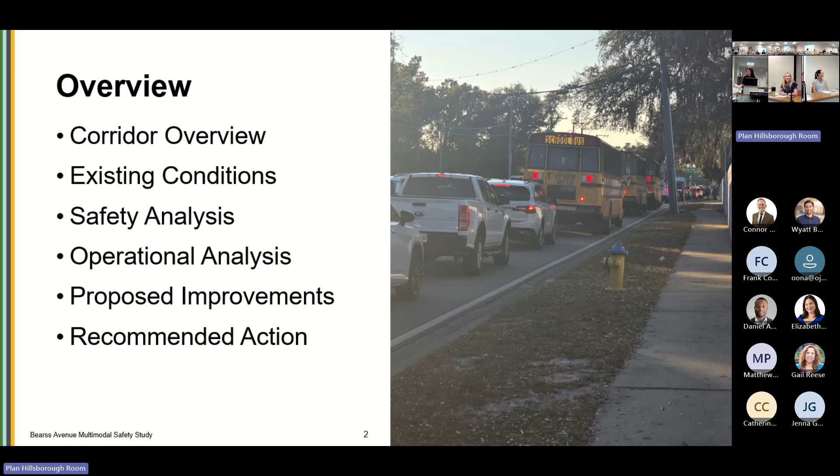I was counting - so that's nine. To give you a better orientation, I'm glad Hillsborough County Schools is here today because Buchanan Middle School is on the very western half of the segment, on North Boulevard. As I said, Hillsborough County owns Bearss until Florida Avenue, where it changes ownership or maintenance to DOT.

So why is this project important? The community profile shows that housing units with no vehicles, low-income households, and renter-occupied households are all above the countywide average. That's one reason why multimodal access is really important along this corridor. The other reason is that we have a middle school on the western side.

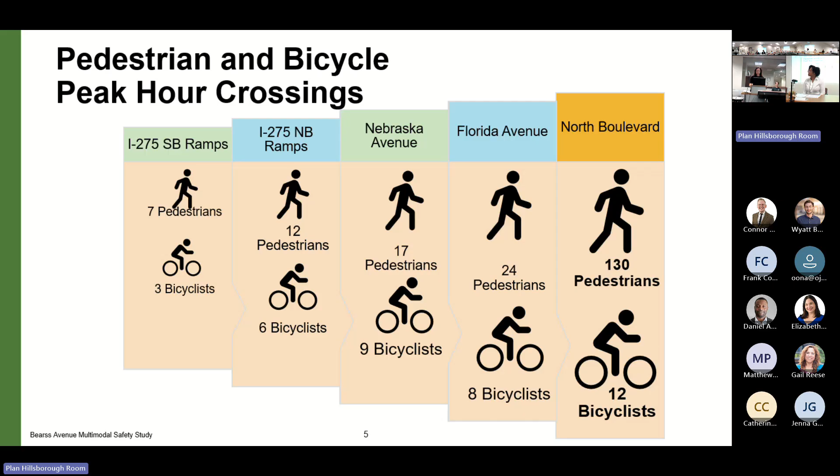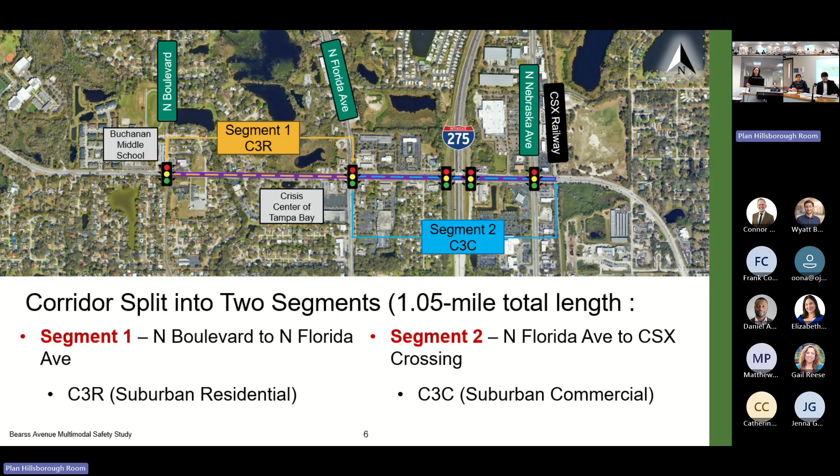To identify the differences in the two halves of the segment: the Hillsborough County owned segment from North Boulevard to Florida has more of a residential feel, with neighborhoods on the north and south sides of the road. It's an urban section with curb and gutter, a 4-lane divided highway with either cross medians or turn lanes. When we get to Florida Avenue, it becomes mainly commercial land uses on the north and south side, and the lane count slightly increases as we head towards Nebraska Avenue, but it stays a divided arterial.

This shows two graphics. The graphic on top is the residential section with curb and gutter, and the graphic on the bottom is the commercial segment 2, which is right now mostly flush shoulder with some drainage swales on the sides.

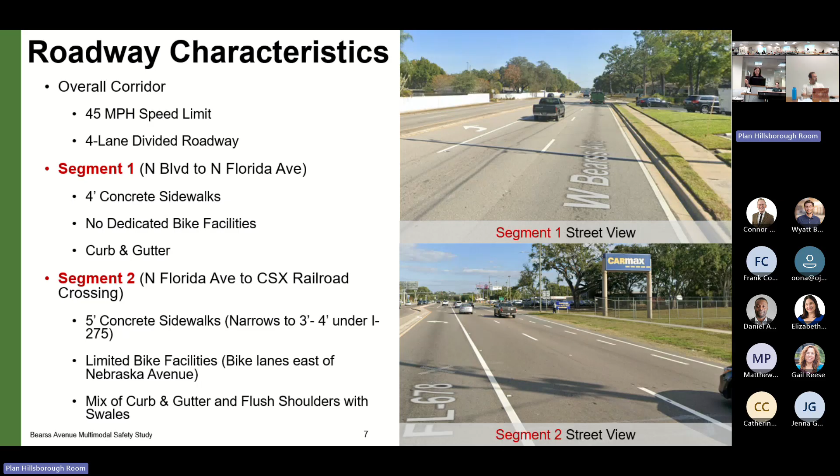There are segments of curb and gutter. Of important mention, the speed limit is 45. The existing sidewalks range from 3 feet to 5 feet, so they're quite narrow, and there really are no dedicated bike facilities. The only bike facility is a very short segment that starts east of Nebraska, at the very far eastern end of the study corridor.

We did a field review, and we also found that there are a number of ADA issues, meaning a lack of ADA compliance with the ramps and push buttons along the corridor.

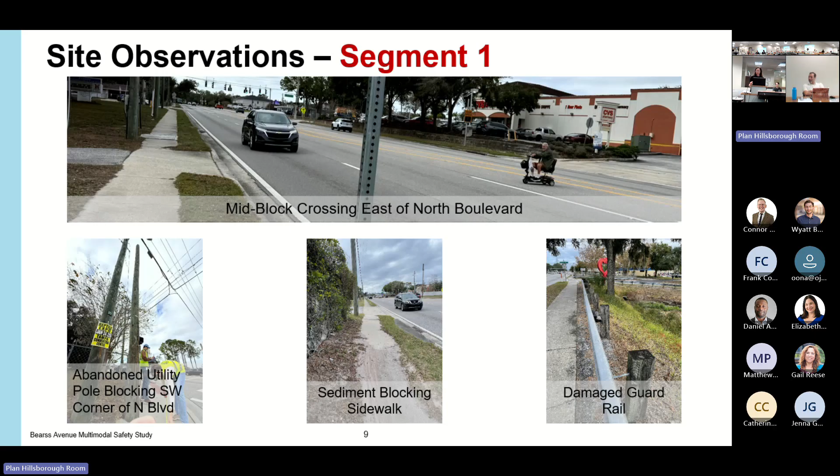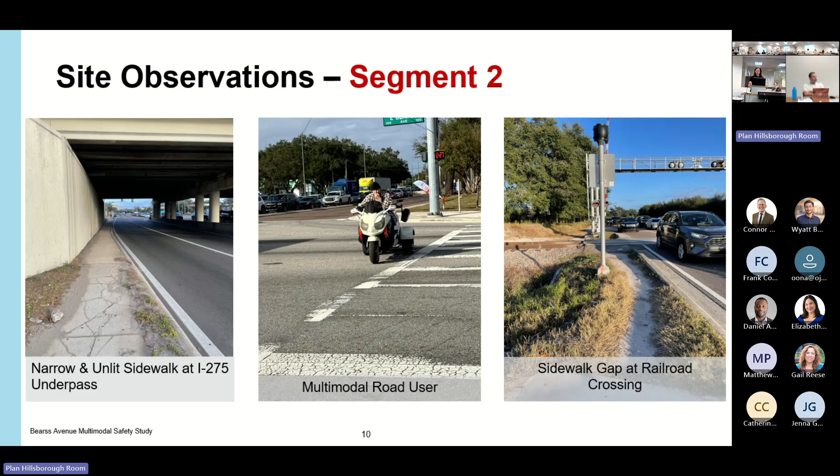Some other things we noticed during the field review: there's a lot of different micro mobility throughout the corridor. This picture at the top is just one of many we noticed of micro mobility. This gentleman was actually crossing mid-block, which is one of the least safe ways to cross - an uncontrolled crossing. That's another micro mobility example. The sidewalk under the I-275 overpass is actually the narrowest part and has the highest stress level for pedestrians and bikes. There's also a lack of sidewalk within the railroad right of way, shown in the picture on the far right. You can tell it's highly traveled because there's a dirt path through it, but there's no sidewalk on the north or south side of Bearss.

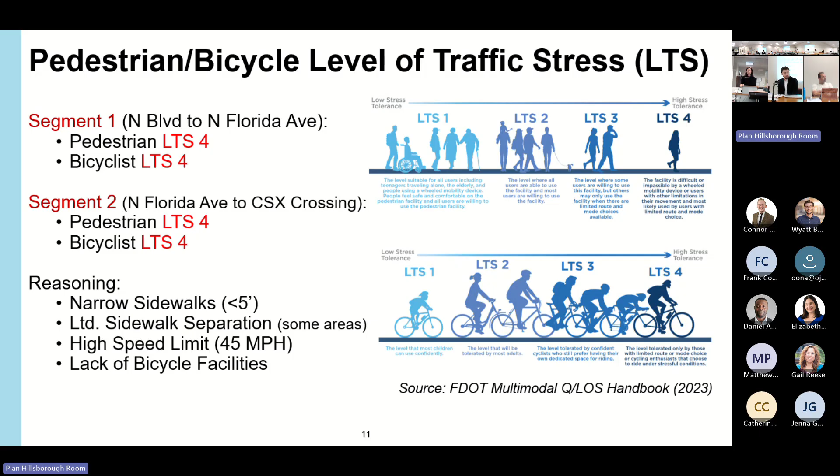I mentioned level of stress - the level of stress analysis showed that for both pedestrians and bicycles, it's the highest level of stress, a level of stress 4, which means we need to make some improvements to the multimodal facilities along Bearss.

We did an in-depth crash analysis. For the pedestrian crashes, they were all concentrated between North Boulevard and I-275. We had 4 high severity pedestrian crashes, which is a very high number considering the short distance of the segment. It resulted in 1 fatality, two people incapacitated, and 2 others with non-incapacitating but higher severity injuries.

There were 4 crash events but 1 involved 2 people, so 5 people total. Three crashes occurred during mid-block crossings between North Florida and I-275 - they were crossing at an unsignalized location and darting across the road. That resulted in a fatality and 2 incapacitating injuries.

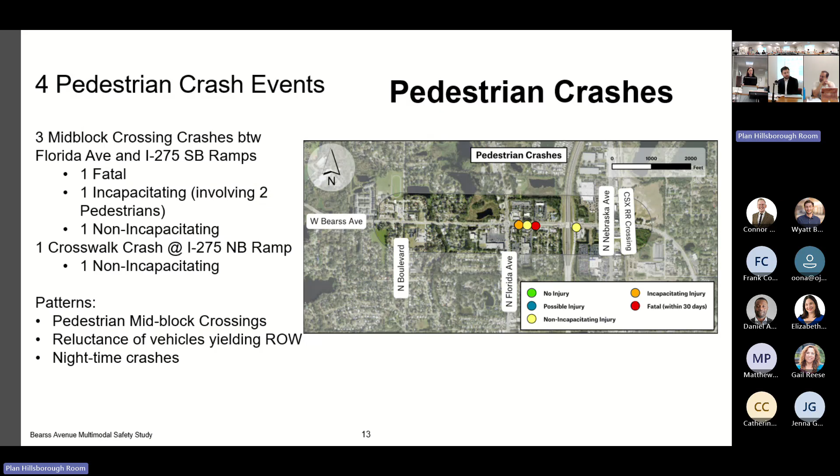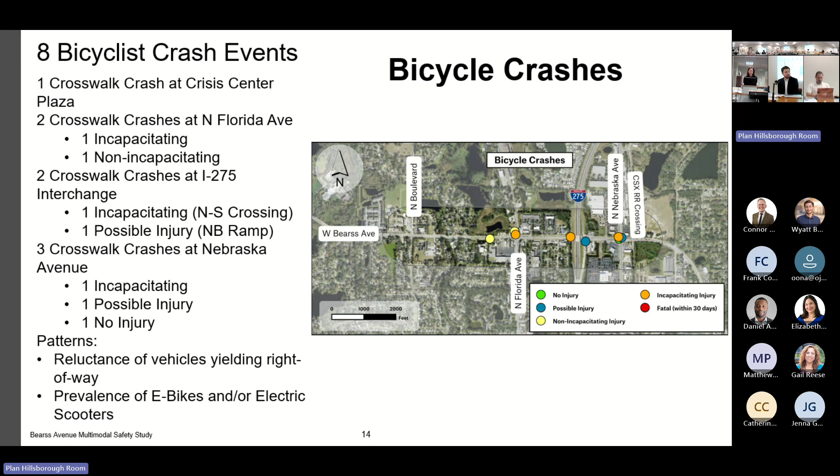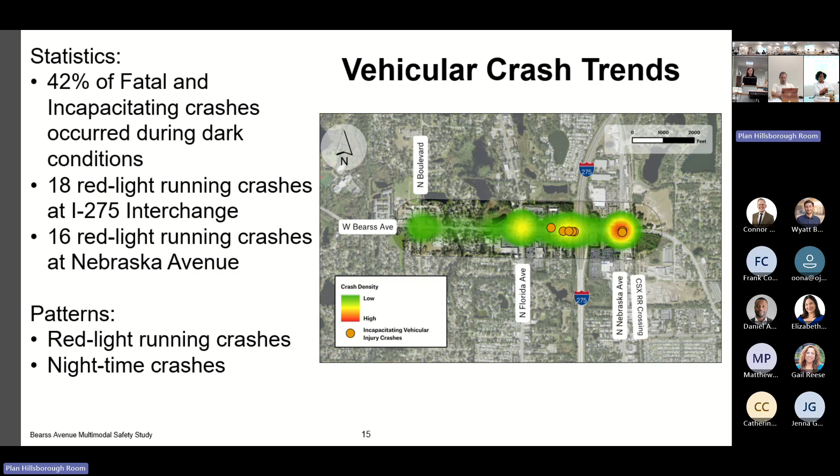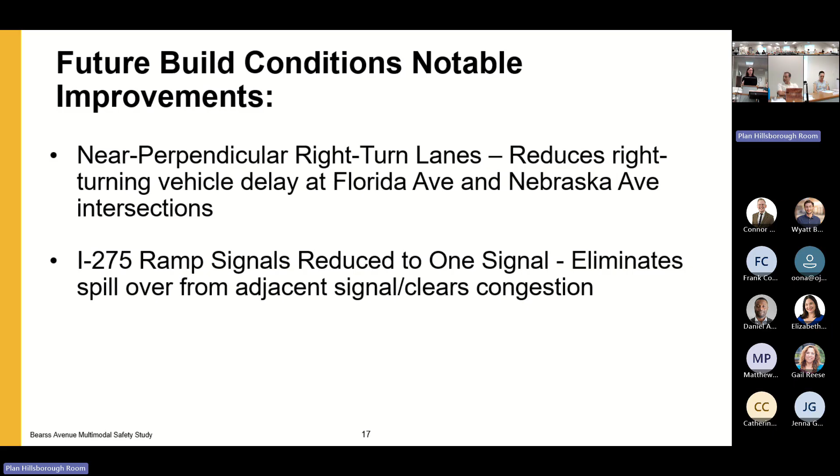One of our recommendations for Florida and Nebraska is to install what's called near perpendicular right turn lanes. That's also going to help with vehicle delay, but also increase the awareness of the driver to reduce the crosswalk crashes - the crashes occurring in the crosswalk.

Diving into our proposed improvements along the corridor, I'm going to go through corridor improvements, and then I'm going to get into intersection specific improvements.

Our recommended corridor improvement for a ped bike facility is to do a shared use path. This is going to be the safest solution for the speed of the road, and also the most feasible solution instead of trying to repurpose a lane and turn it into a dedicated bike facility. We're recommending a shared use path that provides a curb separating the vehicles from the path.

It provides a wide enough facility that it can be used comfortably by pedestrians and bikes. Our second corridor wide improvement is the lighting, which relates to the high percentage of nighttime crashes. For speed reduction, we're recommending narrowing the lane widths to 11 feet. We're also recommending street trees in the medians along the Hillsborough County segment.

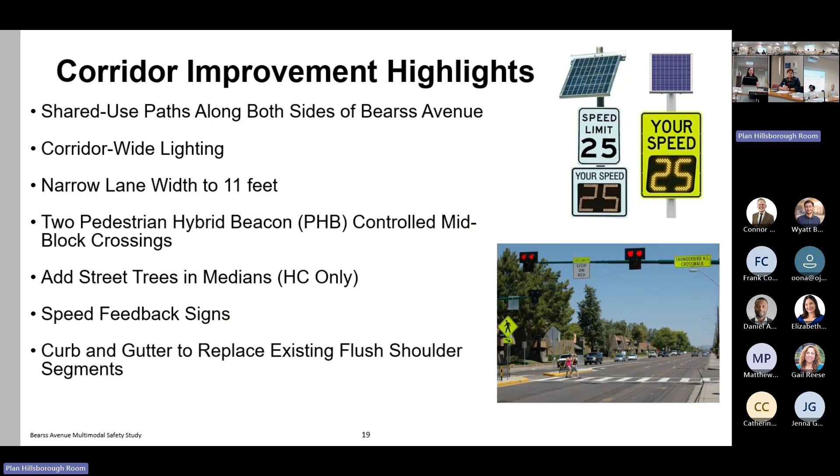There are some grass medians where we can install street trees. We're also recommending speed feedback signs, and to offset the mid-block crossing crashes for pedestrians, we're recommending two pedestrian hybrid beacon controlled mid-block crossings. One of those is going in the exact location where we have the existing crash history for pedestrians. The other we're recommending in front of the crisis center, between North Boulevard and Florida. You notice people crossing mid-block there. Fortunately we don't have the crash history, but we want to get ahead of that and provide a safe crossing, because it's a decently far distance to the nearest signalized intersection.

Jumping into intersection specific improvements, internally illuminated street signs and updating the backplates for all the signal heads are two pretty easy improvements to make. The more costly and design intensive improvements that we feel are necessary are upgrading any strain pole signals to mast arms and upgrading all the signal technology to the latest ITS technology.

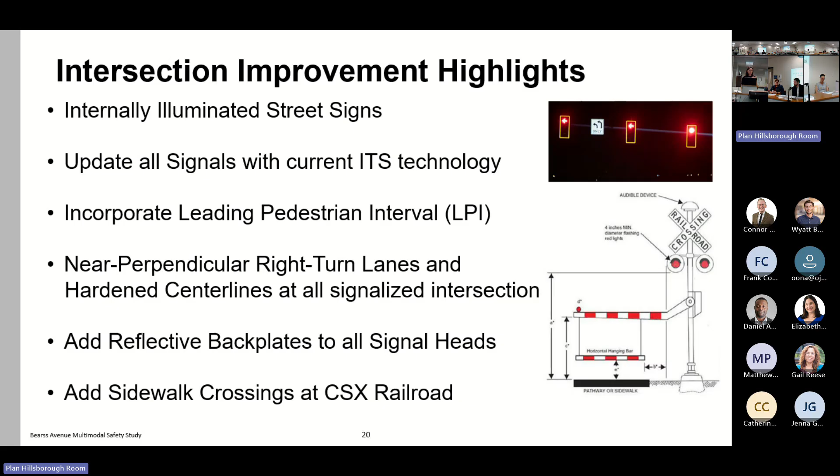I already mentioned the near perpendicular right turn lanes, and with adding sidewalks across the railroad crossing, we're going to need to change the railroad signals so the arms stop anybody using the sidewalks.

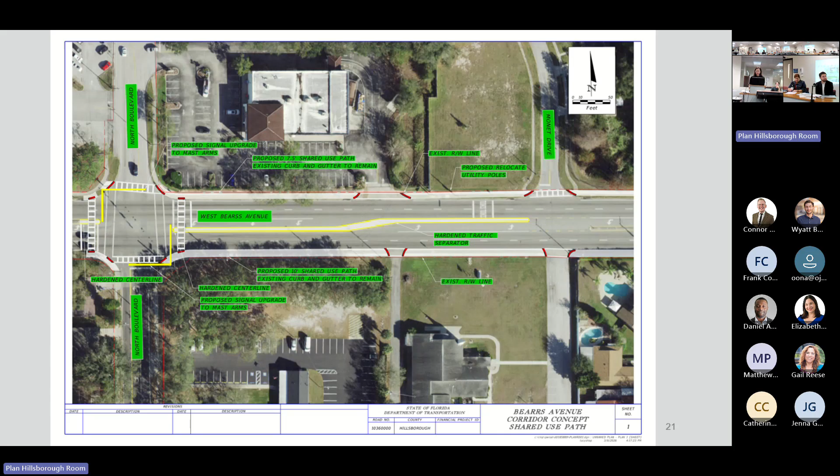These are some corridor maps we put together to graphically show the improvements. This starts at North Boulevard, at Buchanan Middle School. This shows the shared use path on the north and south side, and the signal upgrades at North Boulevard. As we go east, it's the same proposed typical section.

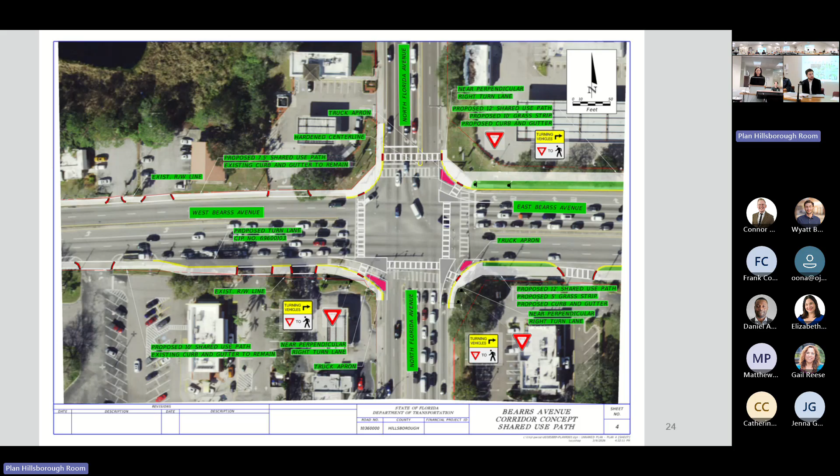This is the first pedestrian hybrid beacon mid-block crossing in front of the crisis center. Then at Florida Avenue, we're showing how the near perpendicular right turn lanes would be incorporated into the intersection.

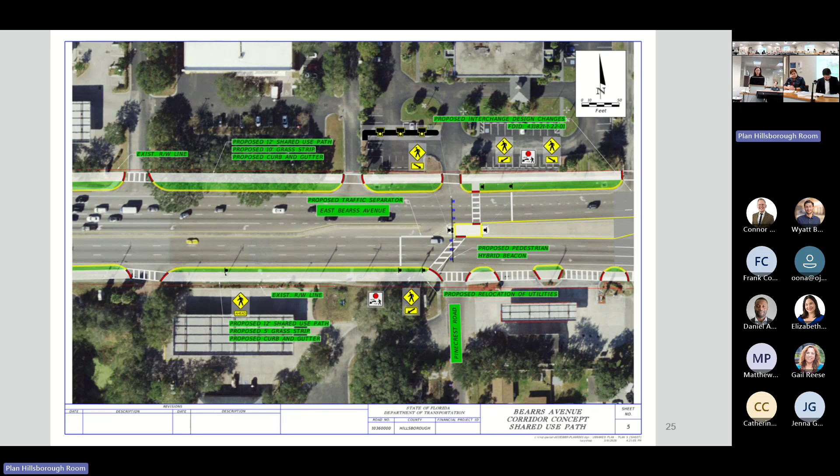This is our second mid-block crossing, right where those pedestrian crashes have occurred before we get to I-275. And this is the I-275 overpass. This lane geometry you see is the current concept DOT is considering for their future design.

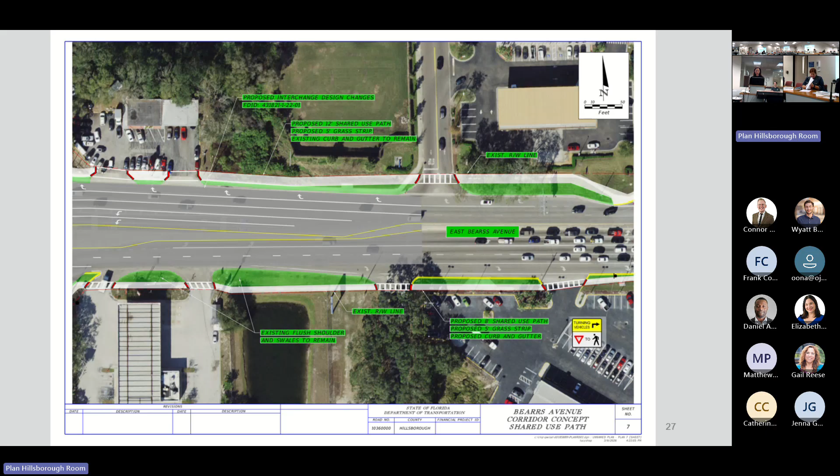As we're heading towards Nebraska Avenue, we again have shared use paths, near perpendicular right turn lanes at Nebraska, and the sidewalk that crosses the CSX right of way. If you're wondering why it becomes a sidewalk through the railroad, that's a CSX constraint - they only allow a 5-foot width instead of a full shared use path.

Last is our difference in typical section. On the top, it's the existing typical section, and on the bottom is the proposed. The main thing to point out here is the wider shared use path on both the north and south side of the road, once the proposed improvements are designed and constructed.

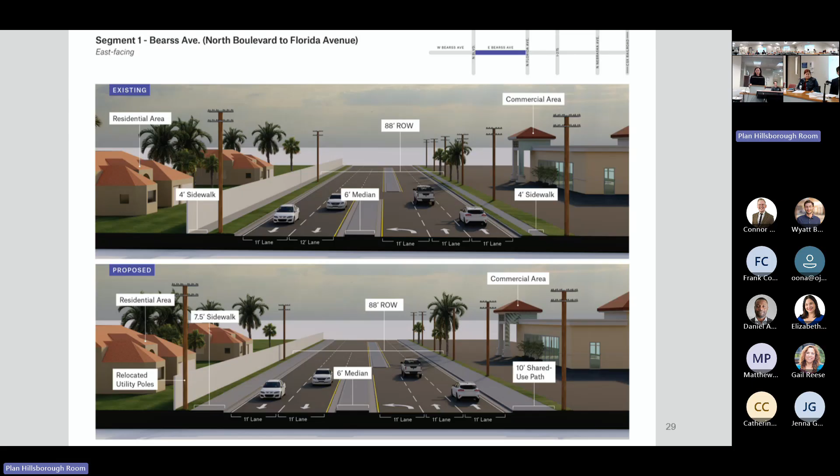This is our second segment from North Florida Avenue to I-275. Again, the shared use paths - we are recommending installing curb and gutter to replace the flush shoulder, just to provide that vehicle and ped/bike separation.

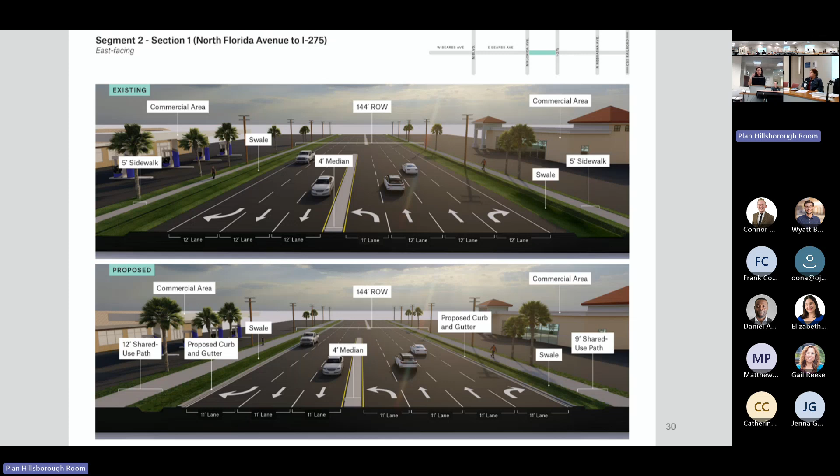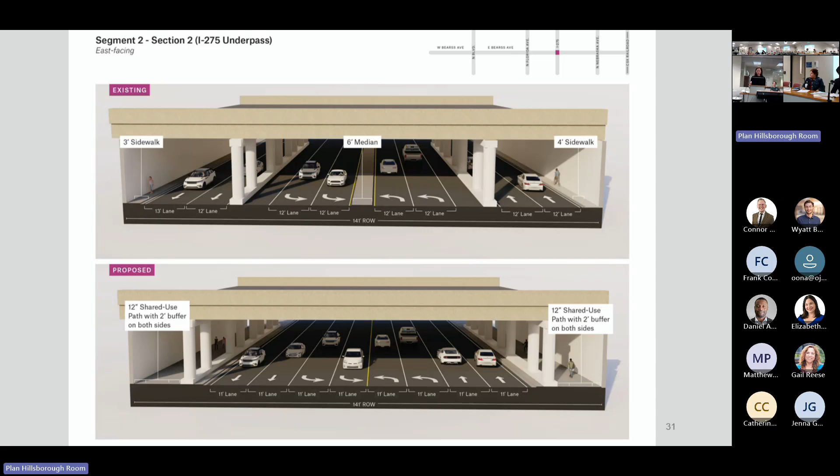This is the I-275 overpass. Fortunately DOT does plan on replacing the overpass itself, so they'll be able to put in a wider span and we can have wider shared use paths on the north and south side. This is our last segment to Nebraska, which today is part flush shoulder, part curb and gutter. We're recommending most of it be curb and gutter with the shared use path.

That concludes my presentation, and I know we might not have a quorum, but we're hoping the TPO recommends approval. All right, well, thank you very much.

Other questions? No kudos on recommending street trees? Yeah, I have a few questions. Excellent, I'm hoping all this goes through. It looks really good. The street trees—Lisa knows I always talk about street trees.

On some of those segments, you had shown the green area between the road and the sidewalk gets wider in certain particular areas. I know you had said in Hillsborough County, they're looking at putting street trees in the median. But as someone who walks occasionally around, it can get very hot here. So the street trees in the median are better than nothing, but they don't offer any shade to pedestrians. Is there any opportunity in some of these areas for street trees to actually provide that shade?

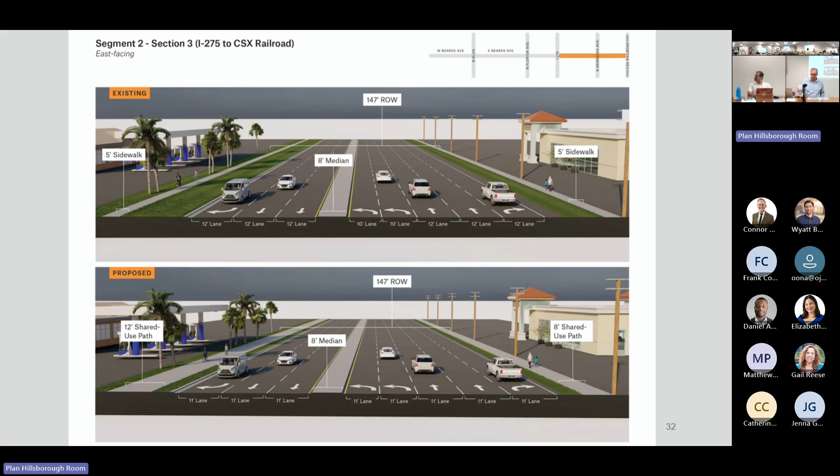It's me. Thank you again.

All right, morning everyone. Hopefully y'all know me by now since I've been on the Livable Roadways Committee for about 2 years now. I'm Omar Pirzada, representative of HART, and I'm here to present on the Transit Development Plan, TDP, major update that we're doing as an agency right now.

So just to touch on what exactly is a TDP: the way I like to think of it is it's HART's vision plan. It's how we want to see our transit improve and grow in the region. It helps us prioritize projects and helps us understand the community needs and see how we can best meet those needs.

More technically speaking, it's our multi-year financial and operating plan for our agency. We're not just doing it for fun, even though it is fun to do, but it's also an FDOT requirement that all public transit providers in the state of Florida complete a TDP in order to continue to receive state funding. If we were not to go through this process, we would lose our state funding, and that would definitely be a bummer, so we don't want to miss out on that.

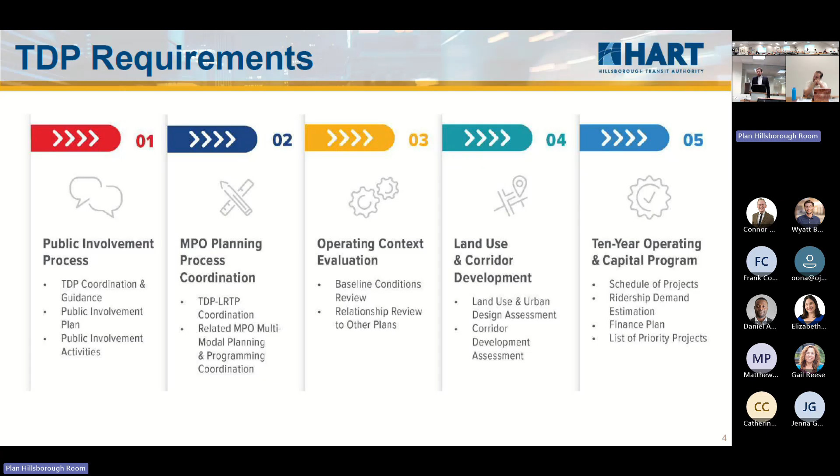And then the main thing I want to get into today - just my plug here. We passed around earlier today these flyers that go over our public involvement activities. March is our big public outreach month for the project, so we're doing a bunch of activities, including an online survey.

You have a QR code right here that you can scan if you're able to take it and provide your feedback. You can answer as just yourself - how you want HART to grow, how you want transit to grow in the region, and how it can best meet the needs of Hillsborough County residents.

We also have our vision workshops. We've already completed 5 of them, but we have 5 upcoming. We're actually doing one tonight in South County, which is a major growing area without a lot of transit, so we're curious how those people feel about how they want HART to grow and serve them in the future. We're also going to be in Brandon, and then we have 3 more workshops next week - one in the Palm River Progress Village area, one in downtown Tampa, and one in South Tampa.

So again, we already did our 5 previous ones - that's on the list you all have. But if any of you are able to attend any of the upcoming ones, or just take the survey too - Catherine, you're at the West Shore one, we appreciate that as well. We just appreciate any feedback and hearing how we want to improve service.

So I'll touch on the timeline of where we are and the next steps. We're in the midst of our TDP outreach, which is mainly the workshops and the survey. But on an ongoing basis, we're also doing other outreach activities throughout the year, whether that's going to our transit and transfer centers and talking directly to riders, talking to community stakeholders as well, just seeing how they want transit service to improve and grow to best meet the needs of people.

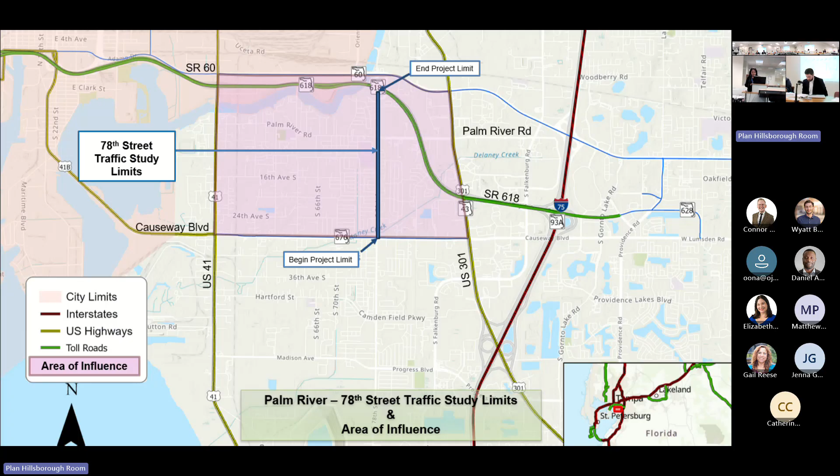There were multiple studies that took place in the Palm River area: the Palm River Progress Village Community Plan, the 78th Street Vision Zero Corridor Work, and the 20-minute neighborhood pilot study.

The Palm River Progress Village Community Plan, updated in 2024, is the study that led us to this Palm River traffic study. The vision statement from that study was to preserve our unique cultural heritage, vibrant neighborhood, and open spaces, and to reduce local road traffic, safeguard waterfronts, green areas, and environmentally sensitive lands.

The community plan elements include traffic congestion, safety, and nodal developments. The community supports a Vision Zero approach to prioritize roadway safety. It also suggests that intersections should be designed to be walkable and reflect best practices in pedestrian-oriented roadway and site design. The nodal development includes two important nodes, also part of our traffic study: Palm River Road and 78th Street, and Causeway Boulevard and 78th Street.

As I mentioned, the Palm River Progress Village Community Plan asked this Palm River traffic study to evaluate through traffic management, safety nodes, transit support, and Vision Zero to enhance community mobility.

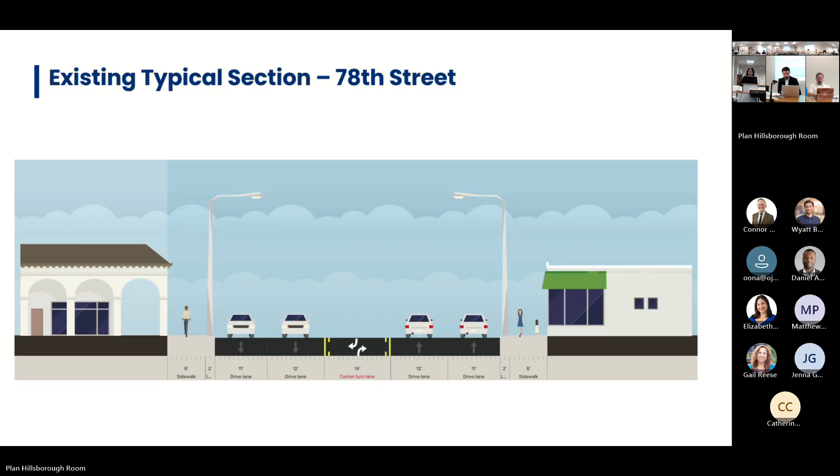The existing condition assessments are currently going on, including safety analysis, active network analysis, and land use context. The safety analysis includes a comprehensive 5-year crash history review using Signal 4 analytics. The active network analysis includes assessment of sidewalks, trails, transit connectivity, and evaluating school zones, senior centers, etc. The land use context includes analysis of surrounding development, zoning conflict, and potential overlay district feasibility.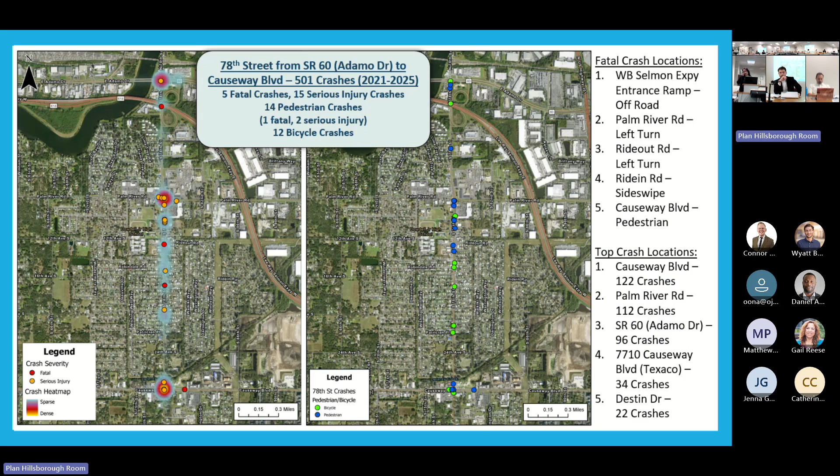A 5-year crash history reveals 501 crashes between 2021 and 2025 in our study area, including 5 fatal crashes, 15 serious injury crashes, 14 pedestrian crashes, and 12 bicycle crashes. So safety is an issue in that corridor. The estimated economic loss from all these crashes between 2021 and 2025 is more than $96 million.

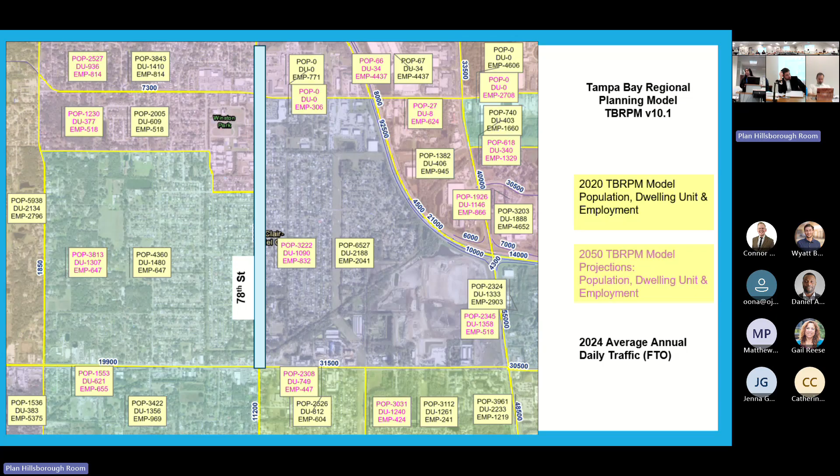The Tampa Bay Regional Planning Model, TBRPM version 10.1, will be used to perform the sub-area model validation. It will also be used for evaluating growth rates and getting the 2050 model volumes for the future conditions analysis. The TBRPM model shows a steady growth rate of 3.4% along the 78th Street corridor.

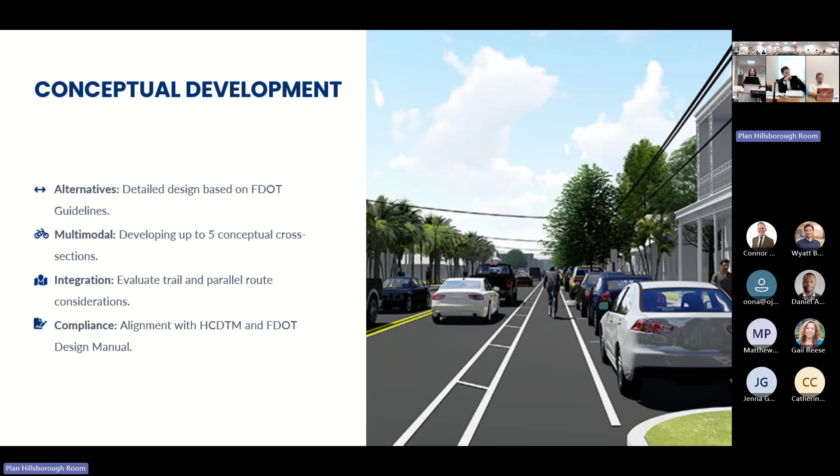The existing condition analysis is going on, and after that, the consultants will perform the future condition analysis. They will develop conceptual plans based on that and provide us with multiple alternatives in alignment with the Hillsborough County Design Transportation Manual and FDOT Design Manual.

This is the project implementation path. We already had the stakeholders coordination meeting in January of this year. The comprehensive existing condition and safety analysis is still going on and near completion. The alternative analysis and model-based build scenarios are also in process. After they're done with the future analysis, we'll have short-term versus long-term improvement plans, prioritized based on Vision Zero goals and review of right-of-way needs, and finally it has to be aligned with the Palm River framework.

Thank you. If you have any questions. Thank you very much, any questions?

I recently rode down 78th Street, and there are bollards everywhere. Is this tied to that, or is it separate? No, that's separate, that's from Public Works. They did the tier 1 improvements, so they have their own separate tiers for the type of improvements. Part of tier 1 was adding the bollards and doing the median art that is now gone. So that was part of their efforts, but it's all happening in coordination. It changed the way I was driving, even made me go a little slower, which is good.

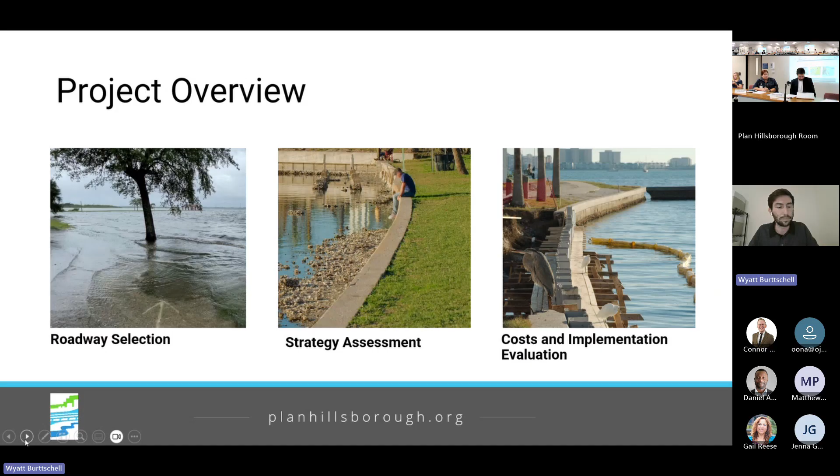There are many aspects to the scope of this project. I won't go through all of them, but as we'll see, many past resilience studies have focused on a system-wide analysis of critical and vulnerable infrastructure. These typically prioritize major corridors based on proximity to key facilities such as hospitals, schools, and evacuation routes, and exposure to hazards such as flooding and hurricanes, as well as a combination of those events with sea level rise projections. As a result, these often emphasize large-scale and high-cost improvements, which are valuable contributions.

So while we do consider criticality and vulnerability as part of this study, we are also shifting some attention and focus to local collector roads, incorporating a range of geographic contexts and vulnerability types, including heat, inland flooding, and coastal flooding.

The outcome will be an illustrated countermeasures toolkit highlighting three representative corridors in Hillsborough County. For each, we'll identify key resilience challenges, propose targeted solutions including design strategies, cost ranges, and potential return on investment, all supported by visual diagrams and best practices from similarly vulnerable regions, as well as best practices from abroad.

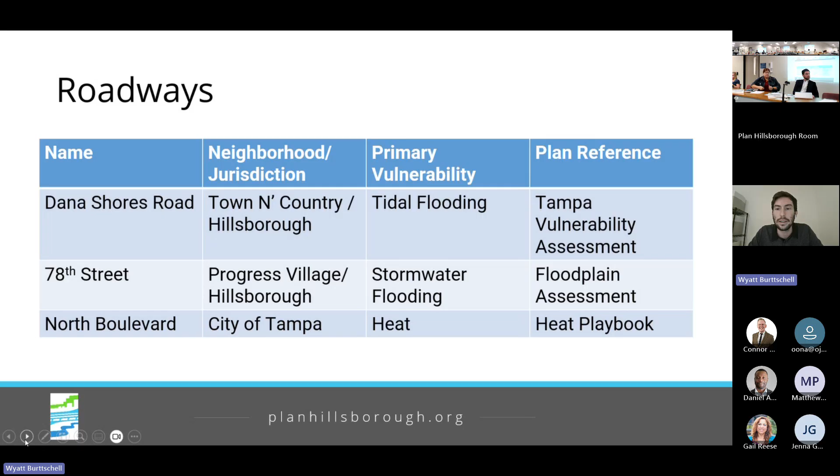The Dana Shores Road, we identified its primary vulnerability as tidal flooding, of course being in a more coastal setting. And 78th Street, we're looking at stormwater flooding in more of an inland context. And then we also have North Boulevard in the city of Tampa, where the predominant challenge is extreme heat.

As I mentioned earlier, we're going to be looking at Dana Shores Drive from Memorial Highway to George Road. This is approximately 1 mile in length. It's an urban minor collector, identified in the Tampa Vulnerability Assessment, and we've received good input from the Hillsborough County Stormwater Division on this particular road, and can share more information on that later.

78th Street, as I mentioned, we're going to be looking at from approximately Eagle Palm Drive to Falkenburg Road. This is a minor arterial with one travel lane designated in each direction.

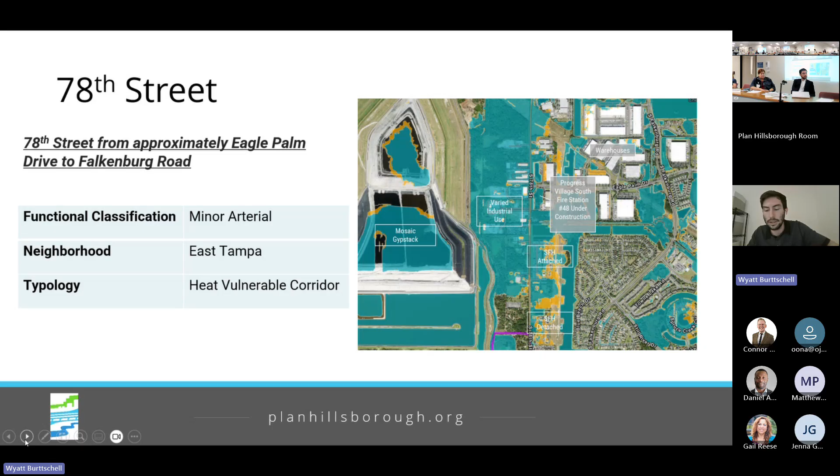And then finally, North Boulevard. We are focused predominantly on heat, extreme heat related countermeasures here. This is near Julian B. Lane, Park, and the University of Tampa.

We're going to be looking at from West Cass Street to Green Street, which is a little bit smaller of a segment, maybe about a quarter of a mile, give or take.

This project came to us from the city of Tampa. They've spent a lot of attention on extreme heat, publishing their extreme heat playbook in 2024, and they had identified 22nd Street for potential cooling efforts and establishing some thermal comfort in that roadway corridor.

We met with the City of Tampa's Sustainability Office, and given that 22nd Street was our initial consideration to study, we decided, with their input, to shift attention to North Boulevard, looking at the City of Tampa's Heat Vulnerability Index. This particular area is pinged on a map as very vulnerable to extreme heat, and we see that there's a lot of potential here to explore some heat countermeasures.